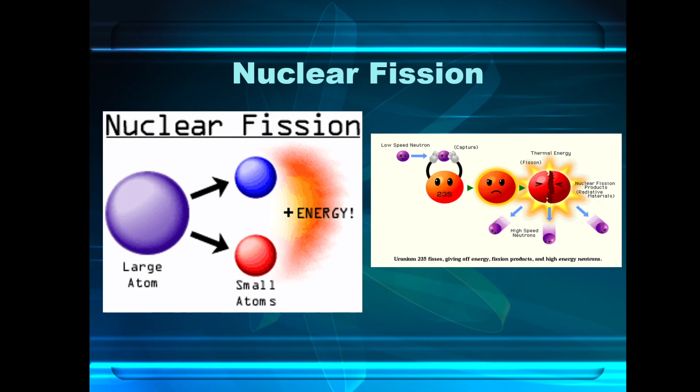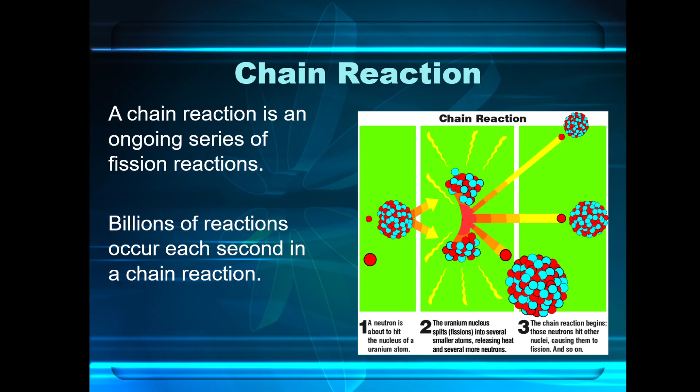Products of fission reaction usually include two or three individual neutrons. The total mass of the product is somewhat less than the mass of uranium-235. A chain reaction is an ongoing series of fission reactions. Billions of reactions occur each second in chain reactions. On Earth, nuclear fission reactions take place in nuclear reactors, which use controlled chain reactions to generate electricity. Uncontrolled chain reactions take place during the explosion of an atomic bomb.

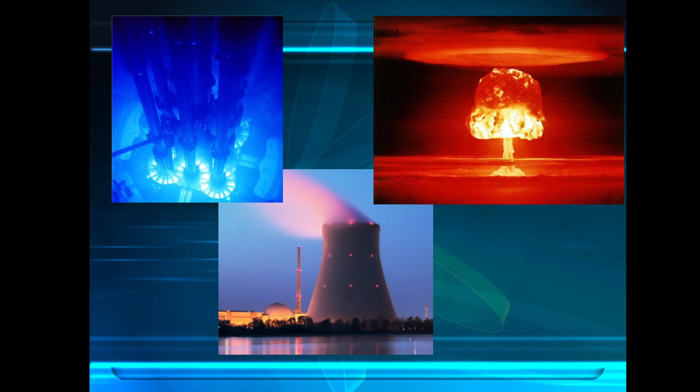The products of nuclear fission reactions are radioactive, but the energy released from this reaction is less harmful to the environment than the use of fossil fuels. The products are intensely radioactive and must be treated or stored.

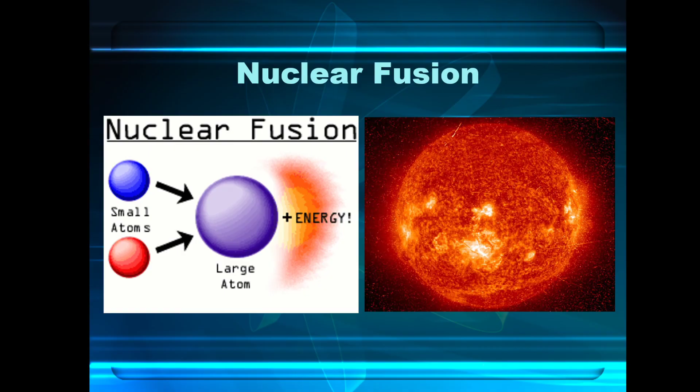Nuclear fusion is the combining of two nuclei with low mass to form one nucleus of larger mass. Nuclear fusion reactions are also called thermonuclear reactions. Nuclear fusion produces less nuclear waste than nuclear fission, and the materials are easier to obtain.

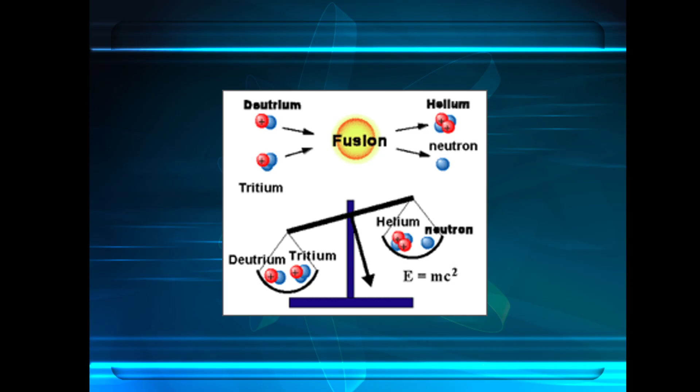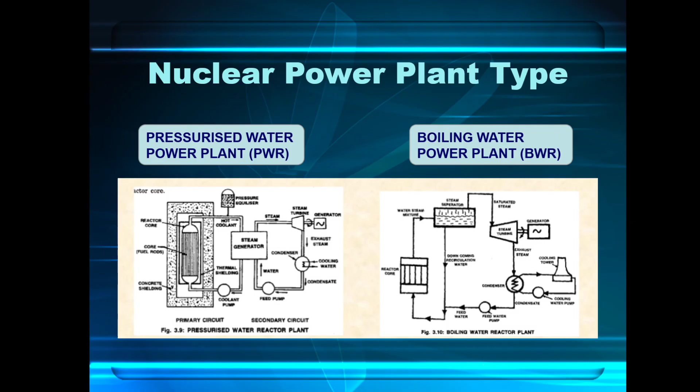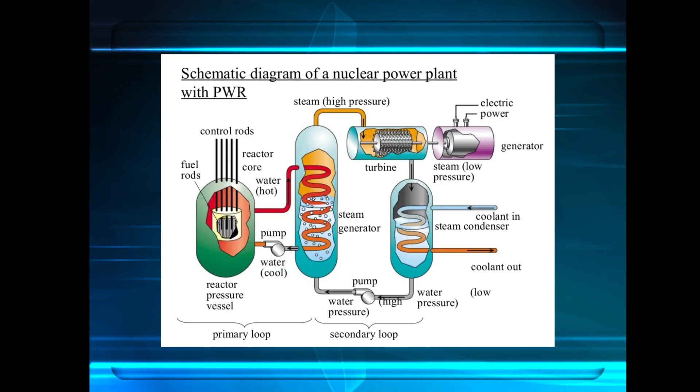Nowadays, nuclear power plants are divided into two types: pressurized water power plant and boiling water power plant. The first we're gonna talk about is the pressurized water power plant. Heat is produced in the reactor due to nuclear fission and there are chain reactions. The heat generated in the reactor is carried away by the coolant circulated through the core.

The purpose of the pressure equalizer is to maintain a constant pressure. This enables water to carry more heat from the reactor. The purpose of the coolant pump is to pump coolant water under pressure into the reactor core. The steam generator is a heat exchanger where the heat from the coolant is transferred onto the water that circulates through the steam generator. As the water passes through the steam generator, it gets converted into steam.

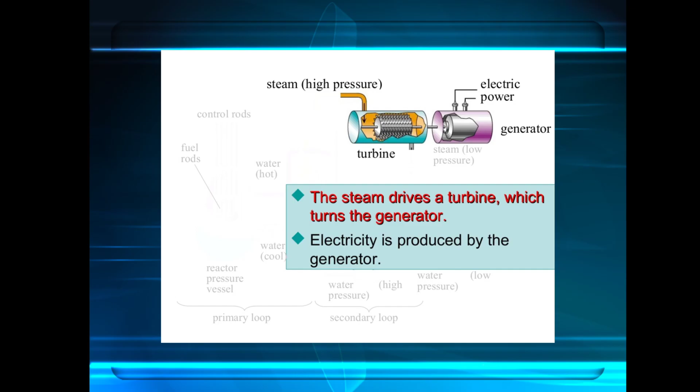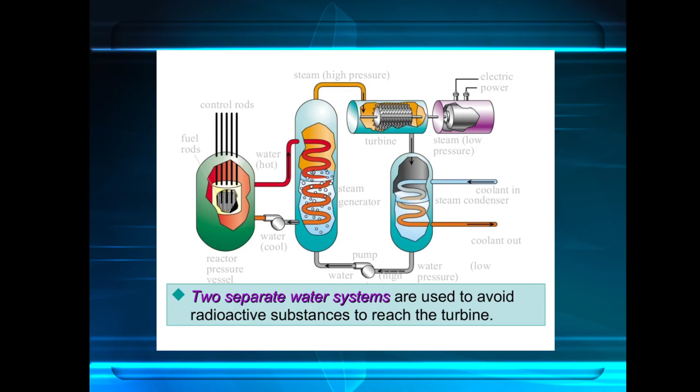And here is the boiling water reactor. The water is circulated through the reactor where it converts to a water-steam mixture. The steam gets collected above the steam separator. The steam is expanded in the turbine which turns the turbine shaft. The expanded steam coming out of the turbine is condensed and is pumped back as feed water by the feed water pump into the reactor core. Also, the downcoming recirculation water from the steam separator is fed back to the reactor core.

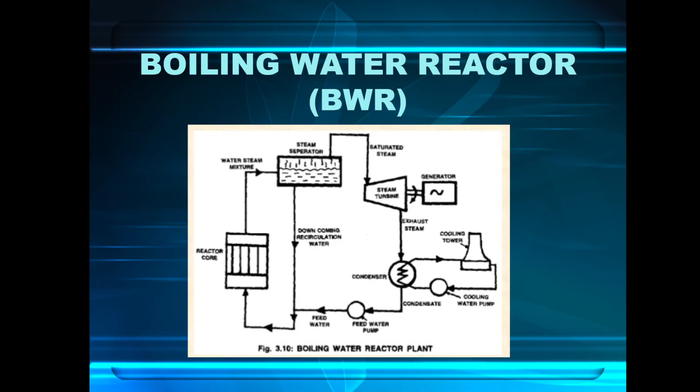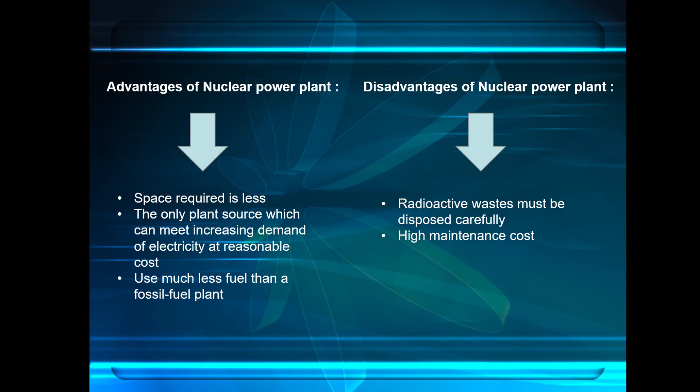In this section, we compare the advantages and disadvantages of nuclear power plants. As we can see, the plus points of nuclear power plants are less required space, being the only plant source which can meet increasing demand of electricity at a reasonable cost, and using much less fuel than a fossil fuel plant. However, high maintenance costs and the treatment of radioactive waste should be the next focus in the future world.

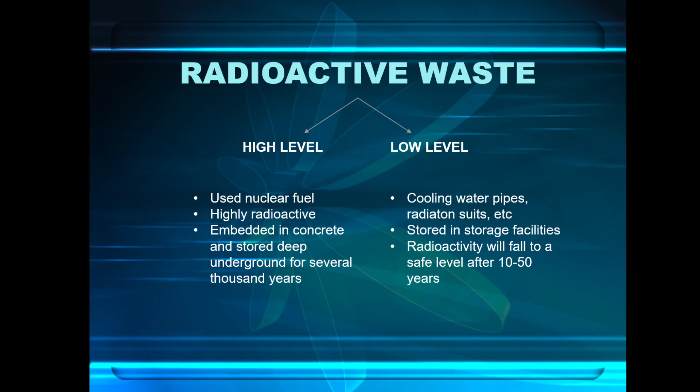Talking about radioactive waste, it has been classified into two levels, high level and low level. An example of high level waste is used nuclear fuel, and low level waste is more like equipment such as cooling water pipes, radiation suits, etc. High level waste needs to be disposed of carefully, embedded in concrete, and stored deep underground for thousands of years. It's a different case for low-level waste. Just store it in storage facilities and the radioactivity will fall to a safe level in 10 to 50 years.

Here is a short review of the latest development of nuclear technology and materials.

Development of an outlook of advanced nuclear energy and technology. The vigorous development of nuclear energy is greatly constrained by economic factors in the open electricity market. Furthermore, issues such as the supply of nuclear fuel, the disposal of nuclear waste, and the prevention of nuclear proliferation pose new challenges to the sustainable development of nuclear energy.

To consider the three aspects of nuclear fuel, nuclear waste, and nuclear non-proliferation as a whole, the world's nuclear energy community is exploring and developing advanced nuclear energy technology. The Generation 4 International Forum, or GIF, selected 6 candidate reactor technologies for further research and development.

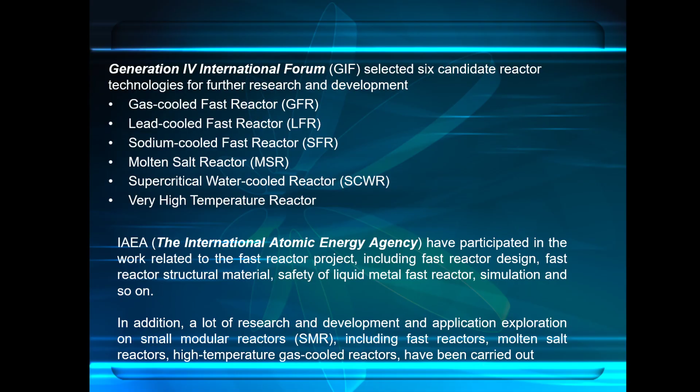However, the IAEA, or the International Atomic Energy Agency, has participated in the work related to the fast reactor project, including fast reactor design, fast reactor structural material, safety of liquid metal fast reactor simulation, and so on. In addition, a lot of research, development and application exploration on small modular reactors, including fast reactors, molten salt reactors, and high temperature gas cooled reactors, have been carried out.

The Nuclear Energy Agency, or NEA, launched the Nuclear Innovation 2050. The NI 2050 covers a wide range of technical fields including reactor system design and operation, fuel and fuel cycle technology, waste management and decommissioning, and non-electrical application.

NI 2050 focuses on aging management and long-term operation, severe accident knowledge and management, decommissioning technology, advanced fuels and materials, advanced fuel recycling, advanced manufacturing and construction, nuclear heating and cogeneration, hybrid energy systems, and waste management and disposal.

In summary, in order to actively cope with global climate change, achieve the carbon dioxide emission reduction targets required by the Paris Agreement, and explore nuclear energy sustainably, various international organizations and major nuclear energy countries are exploring advanced nuclear energy technology and promoting the demonstration of safe and reliable advanced modular small reactors, actively carrying out the research and development of the Generation 4 nuclear energy system and international nuclear energy cooperation.

Here are the future outlooks of advanced nuclear energy technology. First, convert fertile material into fissile material in order to achieve nuclear fuel sustainability. Second, focus on the comprehensive application of advanced small reactors and the innovative application of advanced nuclear energy to build an efficient, low carbon, and flexible smart energy system. And third, strengthen basic research and common technology research and development.

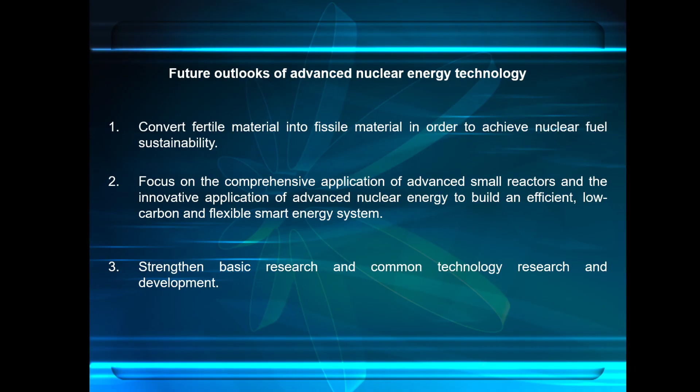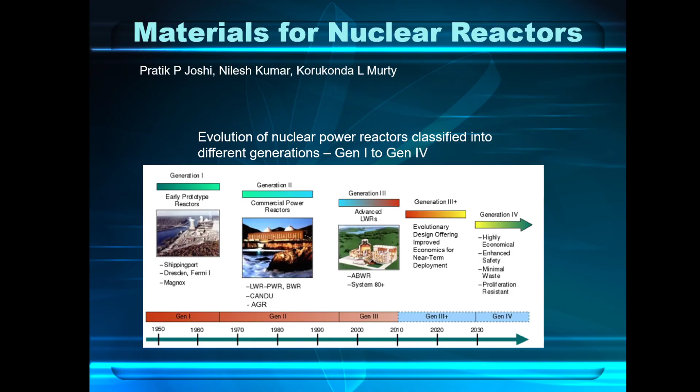The current fleet of nuclear reactors operational in the USA and elsewhere in the world are Gen 2 reactors, while Gen 3 reactors are essentially Gen 2 reactors with improved safety features. Gen 4 reactors are significantly different from Gen 2 and Gen 3. The Gen 4 International Forum down-selected 6 reactor technologies out of 130 reactor concepts that are still at the research and development stage and not expected to be commercially available before 2030.

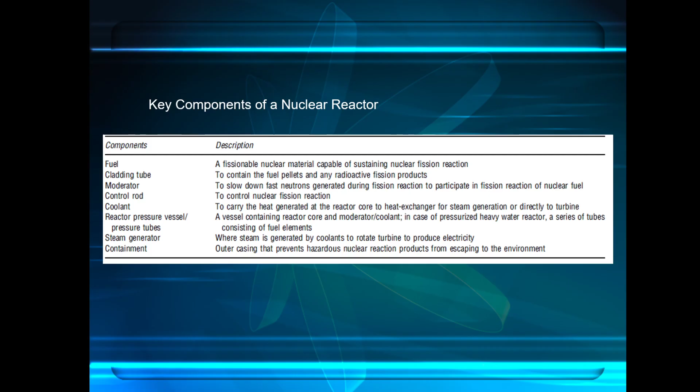Here are the key components of a nuclear reactor. As you can see, there are the fuel cladding tube, moderator, control rod, coolant, reactor pressure vessel, steam generator, and containment. And here is the presence of different service conditions. Stress, water, temperature, and radiation lead to a few commonly observed aging and degradation modes of materials operating in light water reactors.

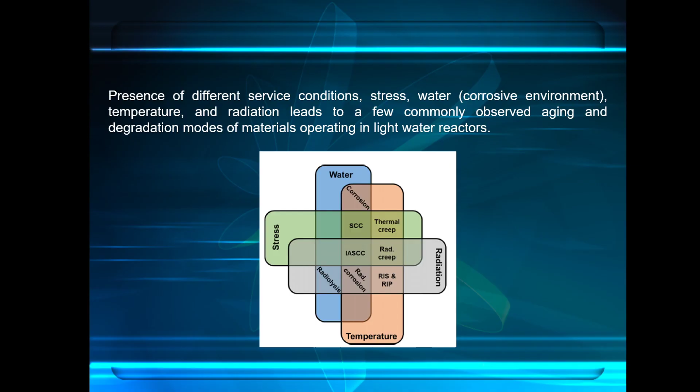The next one is evaluation of LBB characteristics of candidate materials for main steam line piping in Korean nuclear power plants. The leak before break design concept, or LBB, applied to the main steam line piping in the secondary system of Korea standard nuclear power plants had been studied.

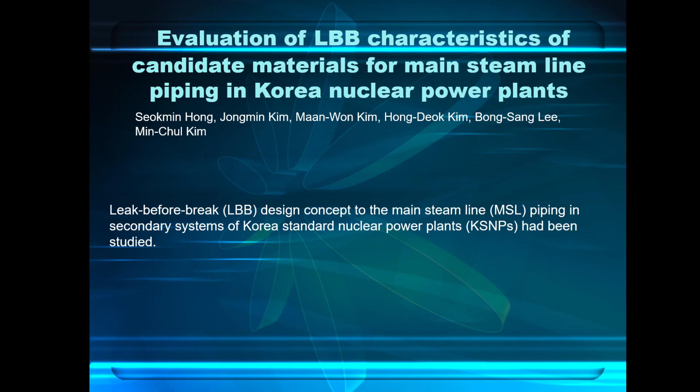The microstructures, mechanical properties, and consequential LBB margins of five candidate materials, SA335 GR P11 or P22, SA508 GR3 CL2, SA508 GR3 CL1, and SA508 GR1A steels, were evaluated, and strong and weak points of candidate materials for applying to MSL piping were analyzed through comprehensive analysis including microstructure, mechanical properties, LBB margin, usage history, economics, and so on.

Three SA508 GR1A steels were used in RCS piping of OPR1000, and they were labeled A1, A2, and A3 according to the manufacturers. The SA508 GR3 CL1 and CL2 steels used in the reactor vessel and steam generator vessel were labeled C1 and C2 respectively. Although C1 and C2 have not been used for piping materials in NPPs, their characteristics were analyzed together to compare the mechanical properties.

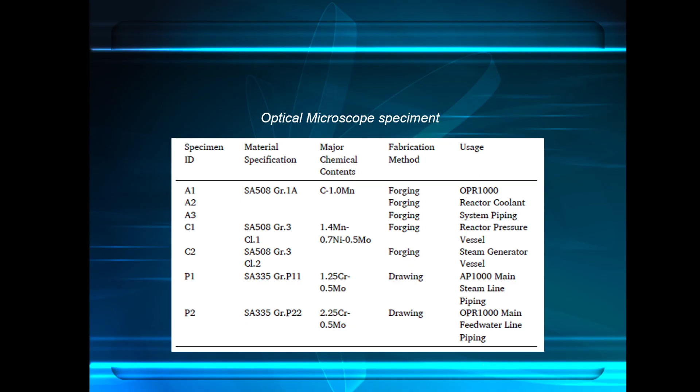SA335 GR P11 and P22, which were used in the main steam line piping of AP1000 and the main feed water piping of OPR1000, were labeled P1 and P2. Here are the optical microscope images of the specimens. The microstructure of SA508 GR1A steels consisted of ferrite, pearlite, and bainite. The grain size of the specimens was different depending on the manufacturer. That of the A1 specimen was coarse, while the A3 was fine.

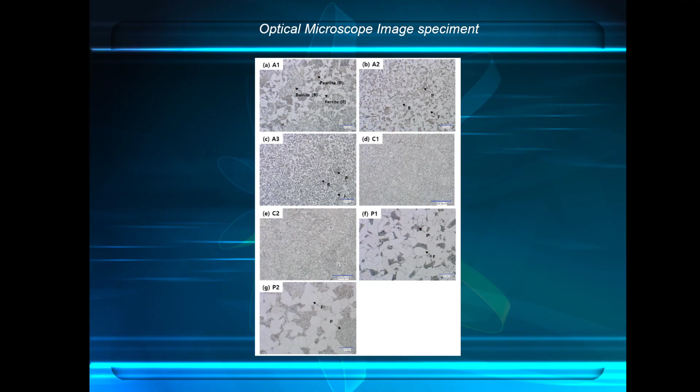The next is cold spray technology in nuclear energy applications, a review of recent advances. Cold spray technology is a promising solid-state, powder-based deposition method for fabrication of coatings, near-net shape manufacturing, and component repair. In recent years, this technology has been investigated for many applications in the nuclear energy sector. CST, or cold spray technology, is a solid-state material deposition process, where micron-sized feedstock powder particles are propelled by pressurized high-velocity gas towards a substrate, where upon impact they form a coating.

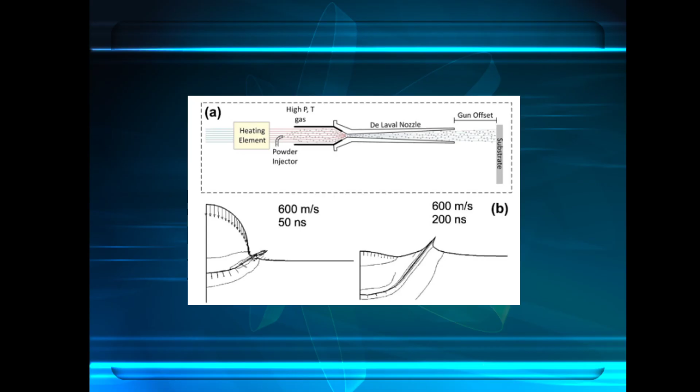Here is a schematic diagram of the cold spray process. In Fig A, the acceleration of powder particles to supersonic velocity is achieved via preheated gas flow through a converging-diverging nozzle system. Above a certain particle velocity, strongly adherent coatings are deposited on substrates due to very high strain rate plastic deformation of particles and associated adiabatic shear instability at the interparticle and particle-substrate interface. Fig B shows material jetting at the interface and localized heating at and in the vicinity of the particle interface due to high velocity impact. Here is the direction of cold spray coating.

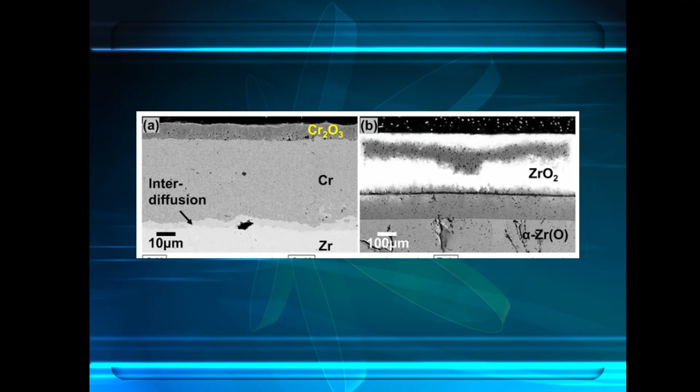Here is an example of the microstructure of oxidized chromium-coated zirconium alloy at 1030 degrees Celsius. The oxidation kinetics for the cold sprayed chromium coatings were comparable to those of bulk chromium samples, indicating that cold sprayed chromium coatings were very dense. At elevated temperatures, interdiffusion at the coating-substrate interface resulted in formation of a chromium-zirconium intermetallic compound layer, which exhibited diffusion-controlled growth kinetics.

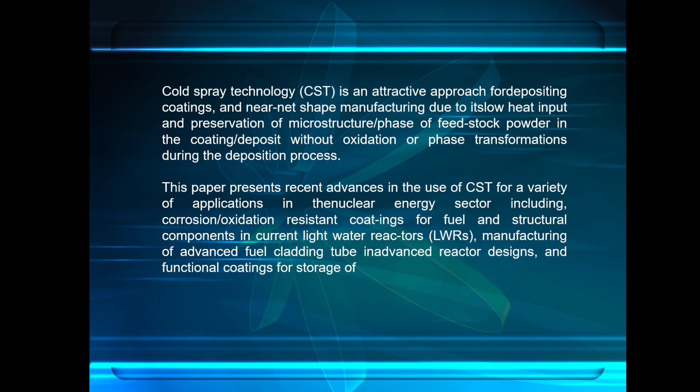Cold spray technology, or CST, is an attractive approach for depositing coatings and near-net shape manufacturing due to its low heat input and preservation of the microstructure of feedstock powder in the coating without oxidation or phase transformation during the deposition process. This paper presents recent advances in the use of CST for a variety of applications in the nuclear energy sector, including corrosion resistant coatings for fuel and structural components in current light water reactors, manufacturing of advanced fuel cladding tubes in advanced reactors, and functional coatings for storage.

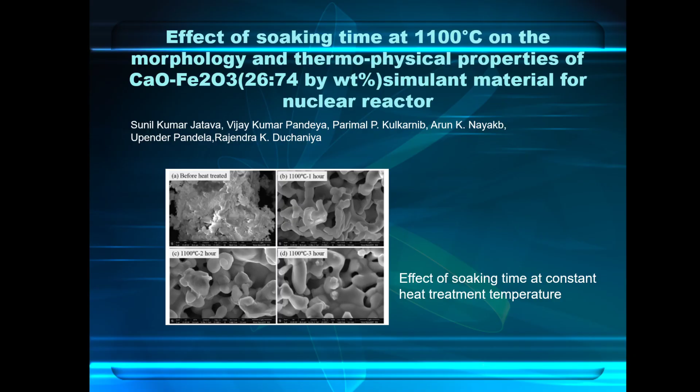And the last one is the effect of soaking time at 1100 Celsius on the morphology and thermophysical properties of CaO-Fe2O3, a simulant material for nuclear reactors. Here is the effect of soaking time at constant heat treatment temperature. The porosity of the material is higher at 1100 Celsius for 1 hour soaking time, but it decreased with increasing soaking time at the same heat treatment temperature. The agglomeration particles in the material increased with increased soaking time at constant HTT. This happened due to formation of new phases at higher temperature.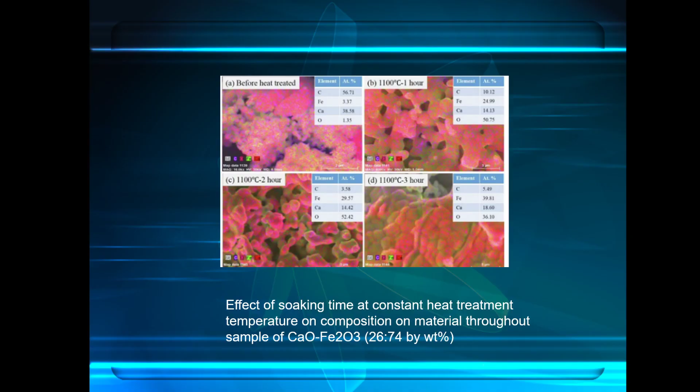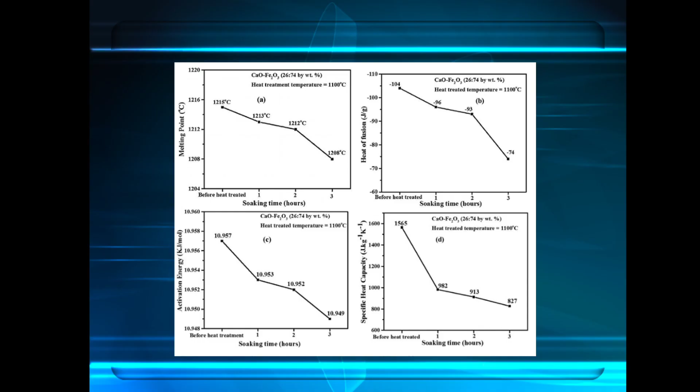And the next one is the effects of soaking time and constant heat treatment temperature on the composition of material throughout the sample. When material is heat treated at high temperature, the material requires lower heat of fusion. When the material was heat treated at high temperature, many unstable phases take place. Due to this change, the properties of the material will alter. The activation energy of CaO-Fe2O3 would decrease after heat treating. The activation energy of CaO was calculated using the Arrhenius equation. Specific heat capacity of a material is the heat required to increase the temperature of 1 gram of material by 1 Celsius. This study was carried out to know the thermal stability of the binary mixture material.

Okay, that's all. A little explanation about nuclear technology.